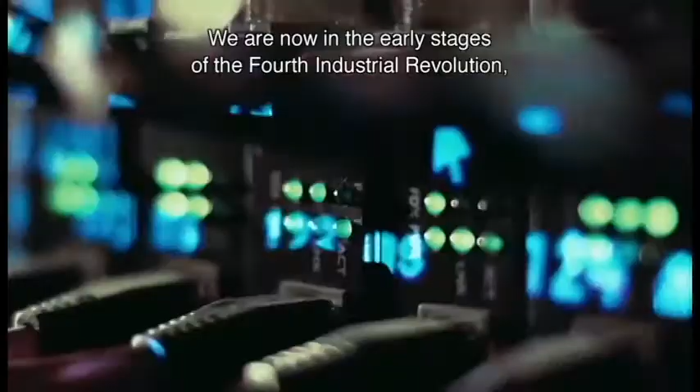We're now in the early stages of the fourth industrial revolution, which is bringing together digital, physical, and biological systems.

One of the features of this fourth industrial revolution is that it doesn't change what we are doing, but it changes us.

We need a different economic model that will allow us to meet the basic needs of every human on the planet, focused not on growth per se, but on maximizing human well-being. We have energy technologies that can power our civilization, but how do we get it and implement it at the scale we need, at a price people around the world can afford?

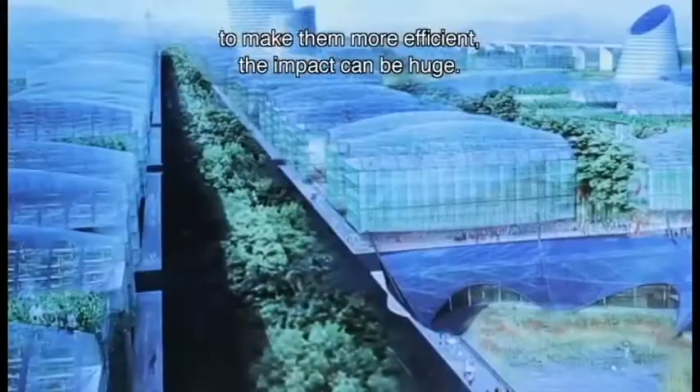If we're able to transform cities to make them more efficient, the impact can be huge. We can use asset tracking, IT, and 3D printing to decouple growth from the resource constraints we have. The question of adding quality to quantity is really about a diverse, safe, healthy, and just world.

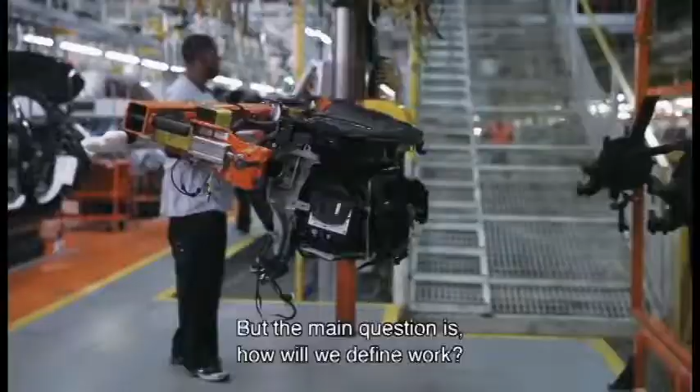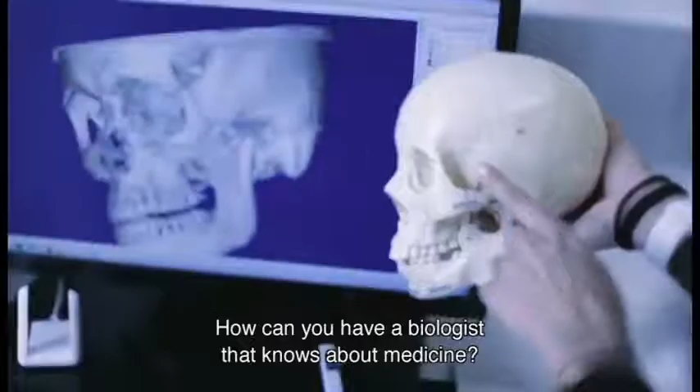It's serious, but the main question is, how will we define work? How will we share the wealth? How can you have a doctor that really knows a lot about data? How can you have a biologist that knows about medicine?

We have to create a space that enables people to think freely, to think divergent thoughts, to think creative thoughts. We really need this ability of digital technology to change outcomes, to truly empower people to create a better world.

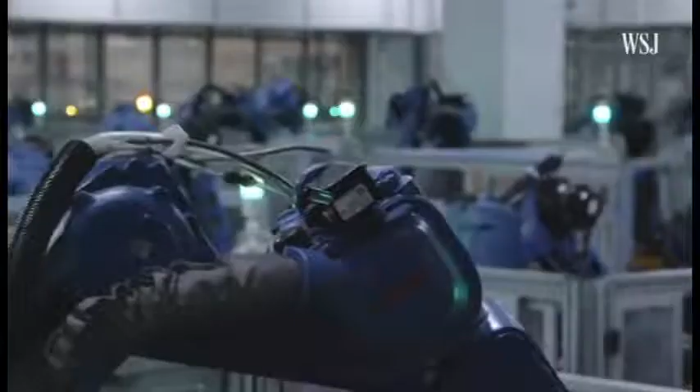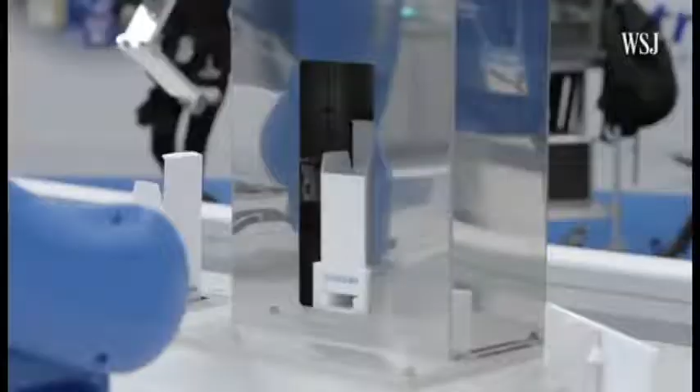Some economists say the world is entering a second machine age. Artificial intelligence and other advancements are enabling robots to do tasks that until now only human eyes, minds, and hands could handle. The head of the robotics division at Yaskawa, Masahiro Ogawa, seems most excited to talk about robots that don't need to be walled off from humans, that work alongside employees.

In the industry, they're called cobots. The International Federation of Robotics predicts that in coming years, cobots will lead the robotics industry. That's partially what's driving startups like China-based Elephant Robotics to get in the game.

If it hits a person, it will just stop. Yeah, so it works with people. Yeah, it works with people, yeah.

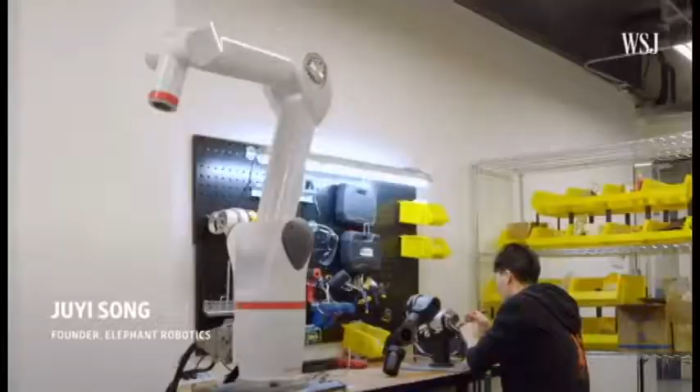We asked their founder, Juyi Song, how his cobot is different from traditional robot arms. It moves not that quickly, and it is very, very light, so it can work with people. This is the most important thing.

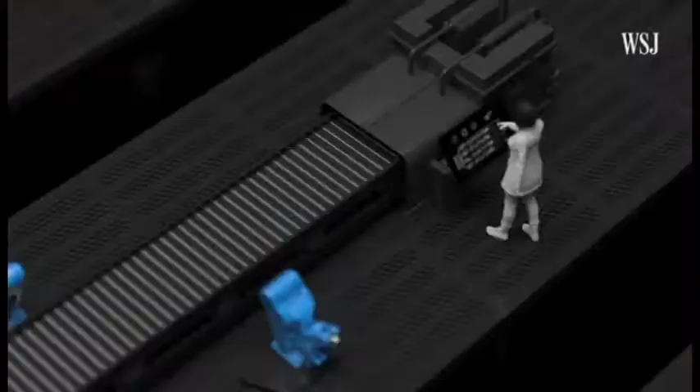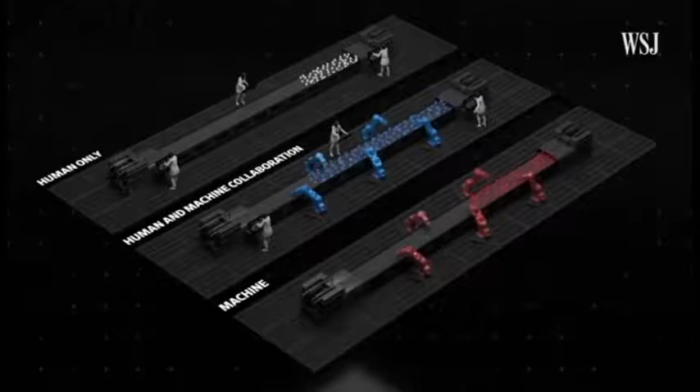In addition to being safer, the collaboration proves to be more productive. A study conducted by MIT researchers found that human-machine groups were more efficient than teams wholly comprised of one or the other. They also reduced human idle time by 85%.

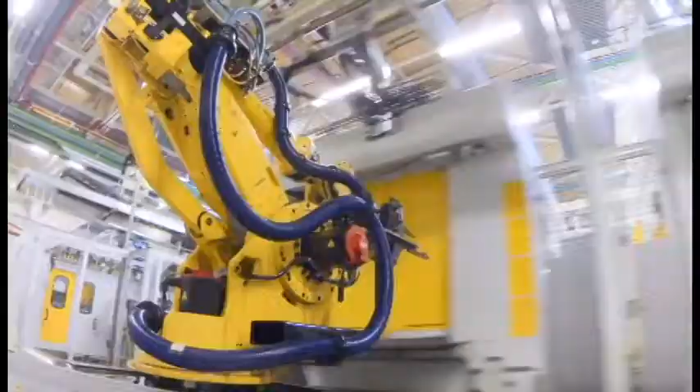Robots and factory automation solutions have been facilitating industrial production for over 60 years. FANUC is present in 120 countries, including Hungary, assisting key sectors like the automotive industry.

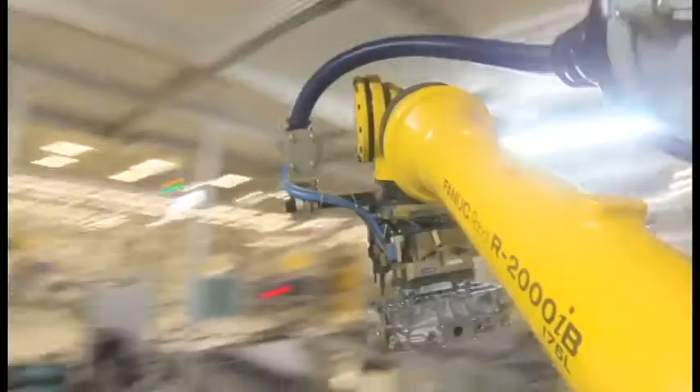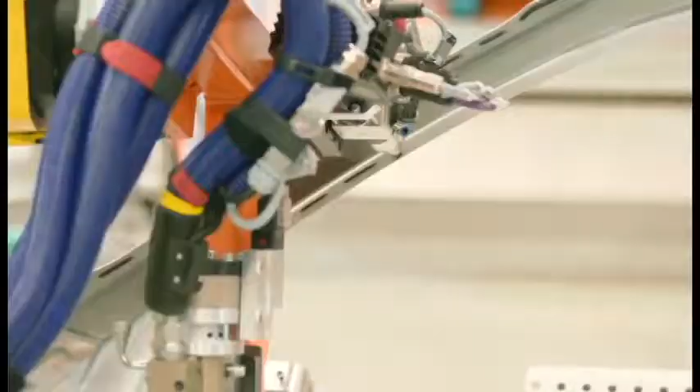For example, at the Audi Hungary Motor Limited factory in Győr, they are developing and manufacturing cars for Audi AG and the Volkswagen Group. Audi Hungary is one of the companies with the largest turnover and export in Hungary, producing 2 million engines and 135,000 cars in 2014.

In our experience, FANUC robots work reliably at our factory. We are constantly improving our production and installing robots to reach our targets. In environments where we need to work with high pressure or temperature, the robots are up to the task and deliver quality standards which would not be possible with human machining.

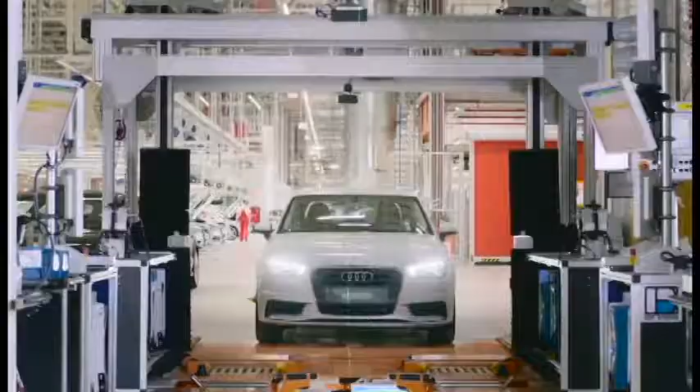Essentially, robots are used for applications too difficult for humans, or where rapid machining is required. Our colleagues like working together with robots, as they make human work easier by handling these tasks. It's very important to program these robots correctly, because when problems arise, it's usually not the robot that causes them, but improper programming or lack of maintenance.

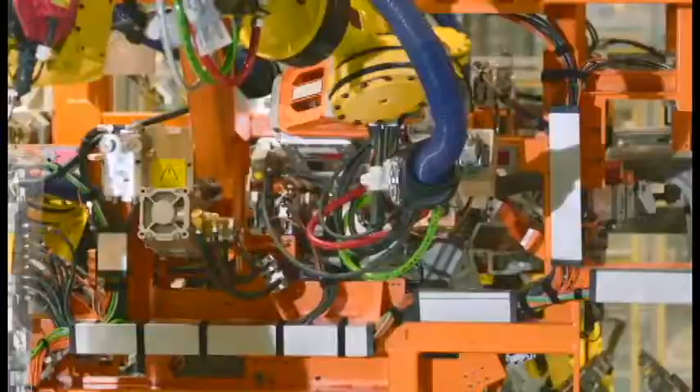Regarding this, I'd like to highlight that FANUC robots are easy to program, dependable, and we have very good experience with them.

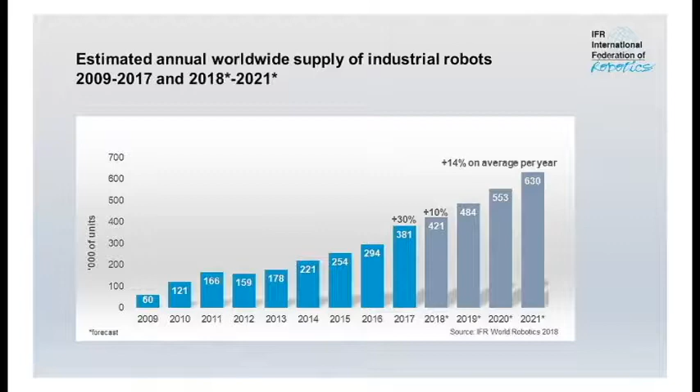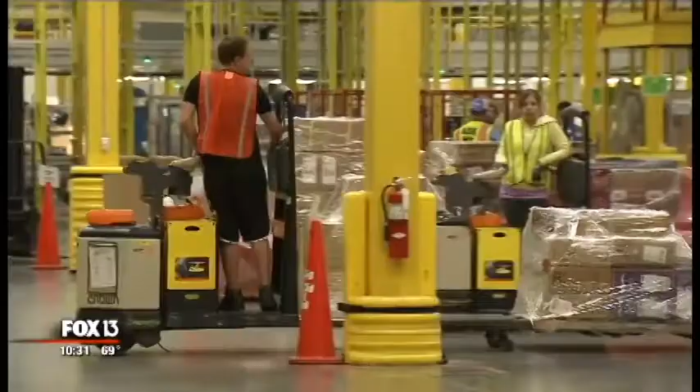With a footprint equal to 59 football fields, this Amazon fulfillment center is simply mammoth. We have the packing, the picking, the slamming, the shipping, the receiving. It's home to an army of employees - a little bit over 800.

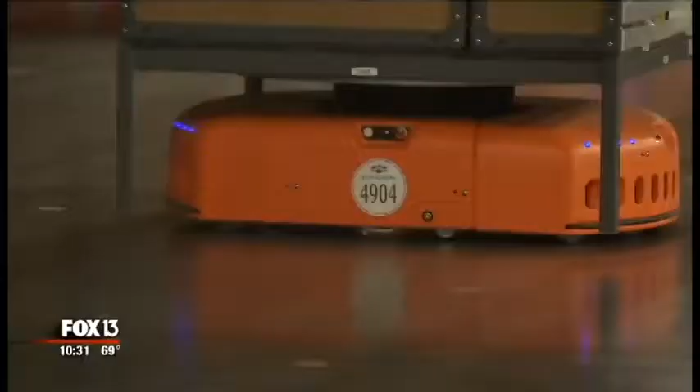One 6-ton pallet-slinging robot we affectionately call Robo-Stow, and a squad of box-shuffling cyborgs. We like to think of it as a symphony between robots and our great associates.

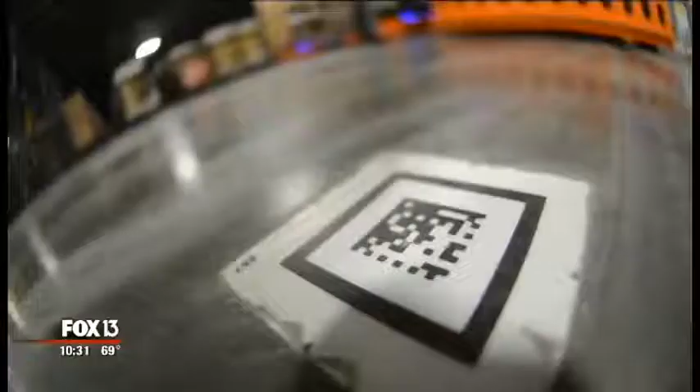We found a secret at our feet. The floor is covered in tiny QR codes - it's sort of like a chessboard. Eyes in the robots' bellies read the codes and broadcast their position, a choreography that keeps your shipment on time and avoids collisions. They know exactly where to go.

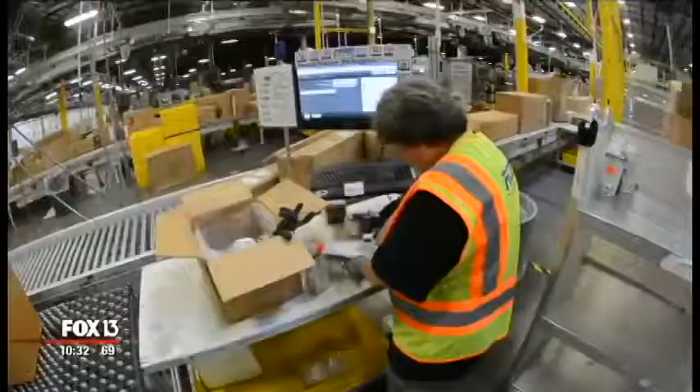Amazon says those shelves are home to 1 million different items. You think the typical customer realizes that? Probably not. We even spotted a toilet in stock - you name it, we have it.

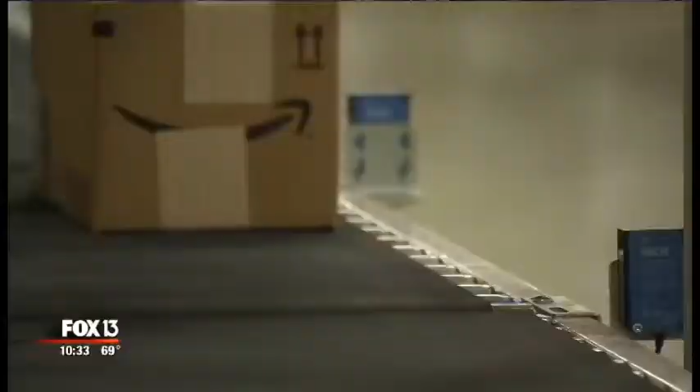Chaos and a supersonic conveyor are what we expected. Manager Chris Monnett explained that speed isn't everything - the important thing is just the flow.

Order levels fluctuate, and yes, there are rush hours. Yet Amazon says its software regulates the line to maintain a steady pace. In order to have 1 million unique items in this facility, you have to be able to do that.

As gaping, gargantuan, gigantic as this fulfillment center is, it's not alone - we have 109 fulfillment centers worldwide. Locally, 59 football fields probably isn't enough either. Our tour guide...

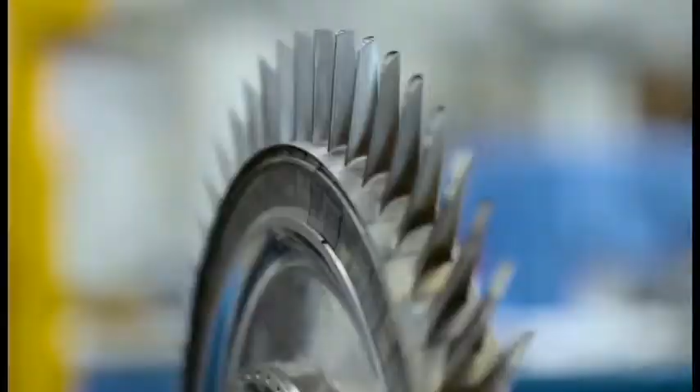The additive manufacturing process enables us to manufacture parts that we cannot manufacture today with normal, traditional manufacturing processes. That enables us to be more ingenious in terms of how we design our turbine blades, how we cool them, and how we life them.

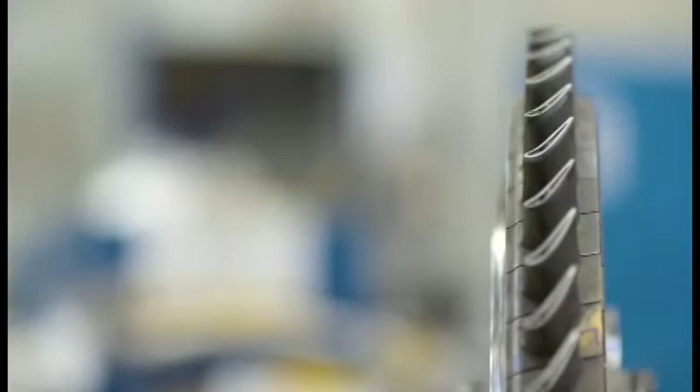Turbine blades has always been, I feel like, a vision. It's a real target, it's the most challenging area of the turbine. So if you can print a turbine blade, you can pretty much print anything. And we've proven over the last couple of weeks now that we have been able to print a turbine blade and test it in an industrial gas turbine engine.

In Lincoln, we're testing a 3D printed blade, and we believe this is special because it's the first time anywhere in the world this has been tested at full load conditions in a gas turbine.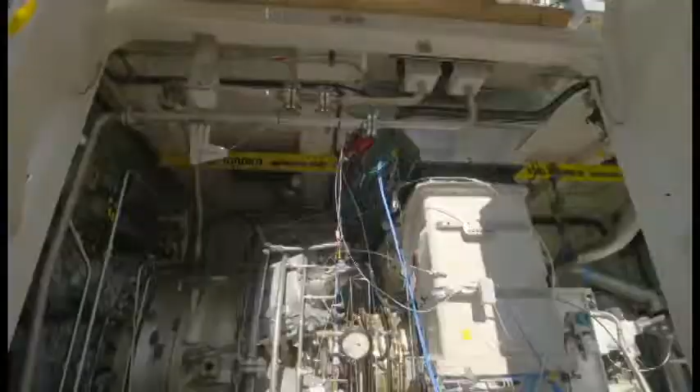We test these blades very quickly. In 1 hour, we run the engine at full load. We put a probe in here to measure the material temperatures which tell us how long this blade will last in a turbine. Now, the turbine blade itself is this particular blade.

Now, this is the high-pressure turbine blade of a 13-megawatt SGT-400. Typically, we have to do all of the design, analysis, the aerodynamics, the work in terms of heat transfer on this blade 2 years before we can actually then understand in an engine how it's actually going to perform.

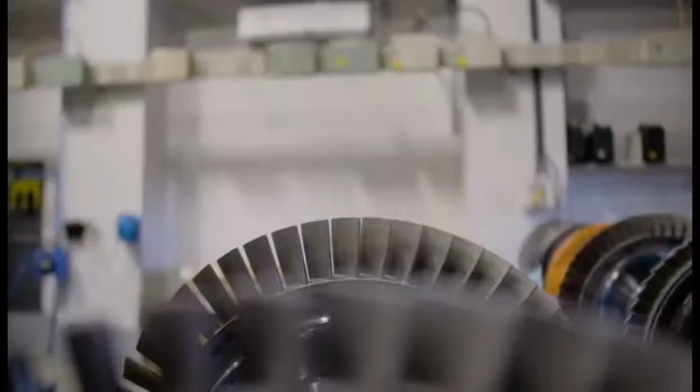What additive manufacture does - and this is the additive manufacture blade that we've actually tested in this engine - this gives us the ability to cut that lead time down from 2 years down to 2 months. It allows us to create new designs, to get more efficient engines, more efficient designs into our turbines, tested, and then onto ultimately our customers.

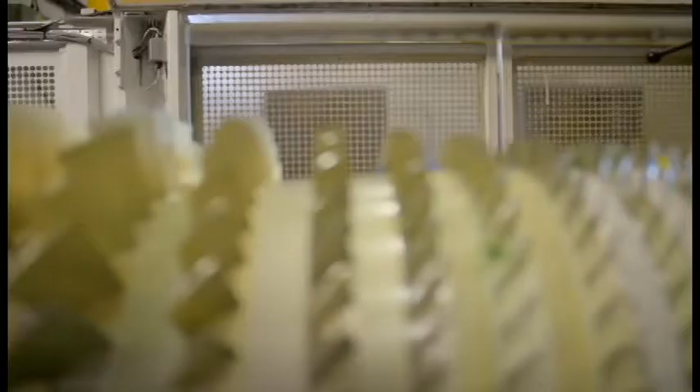We will see quicker development times. You don't need this very expensive tooling in order to make your products, so that makes additive manufacturing perfect for design modifications. You'll get there much quicker.

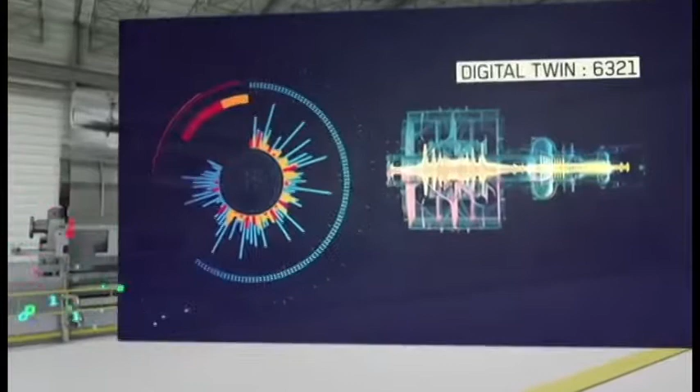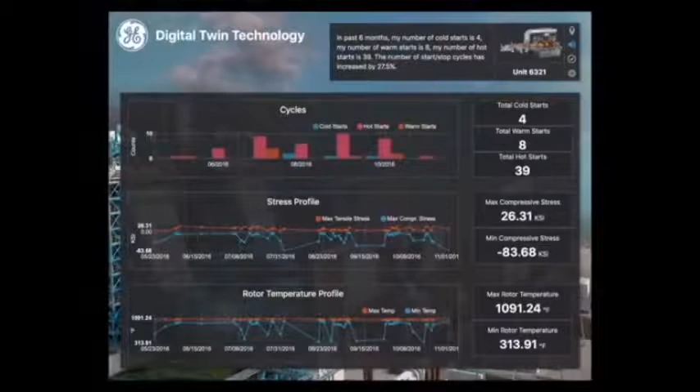Operator, a change in my mission is causing damage to my HP turbine rotor. Okay, Twin, help me understand the problem - what's your operating profile? In past 6 months, my number of cold starts is 4, my number of warm starts is 8, my number of hot starts is 39, the number of start-stop cycles has increased by 27.5%.

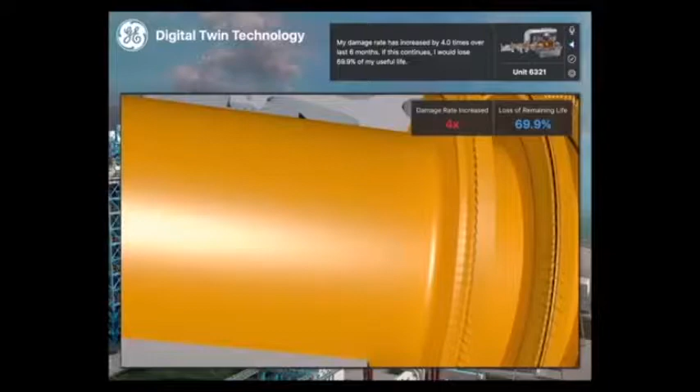Twin, tell me about your rotor damage. My damage rate has increased by 4.0 times over last 6 months. If this continues, I would lose 69.9% of my useful life. Twin, give me options for mitigating that rotor damage.

Based on weather forecasts, historical data, fuel cost, electricity pricing and my present condition, I have 2 options for you to optimize operations. Option 1 is to manually slow down my startup ramp rate so that you can reduce the wear on my rotor. Option 2 is to download the OpFlex app and apply stress controls to minimize wear and reduce fuel consumption too.

Twin, give me the factors you use to calculate option 2. I used my past 15 years of historical data, fleet learning from 125 other D11 steam turbines like me, and 58,965 simulation runs to get this recommendation. I'm 95% confident of my assumptions.

Twin, I need a financial perspective. Tell me about the numbers. The numbers look good. We can reduce stress by 25%, which brings the damage rate back to normal range. Startup fuel cost will go down by 40% and startup time will be cut by 50%. You will also avoid $12 million by preventing an unplanned outage.

Twin, okay, I select option 2. Let's do it. I'm initiating option 2, which is Flex Start. Thank you. This is happening now, today.

This is a representation of a D11 steam turbine that's currently running in Southern California. We call these representations digital twins. What you saw was an example of the human mind working with the mind of our machines. What's a digital twin?

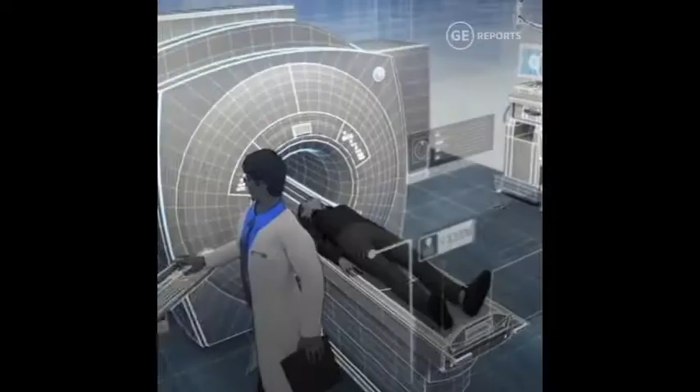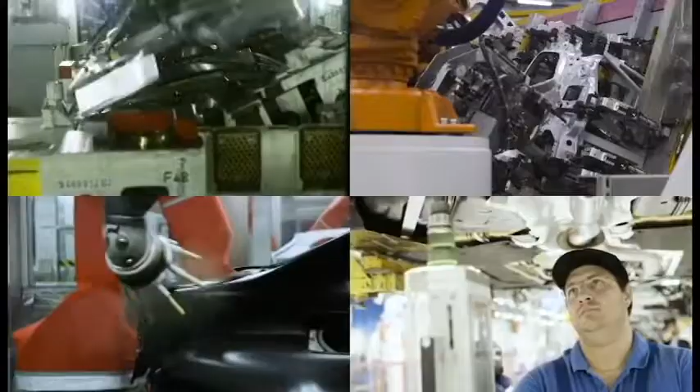Digitalization opens up fascinating new possibilities for the BMW production system. Large quantities of data are generated at many stages in car production. Today, we are already drawing major benefits from intelligent analysis of production data. Our customers benefit from even higher quality. Production uses resources more efficiently, and we are able to manage system maintenance more precisely. Let's take a closer look at the innovative solutions that emerge when our specialists immerse themselves in the virtual world of data.

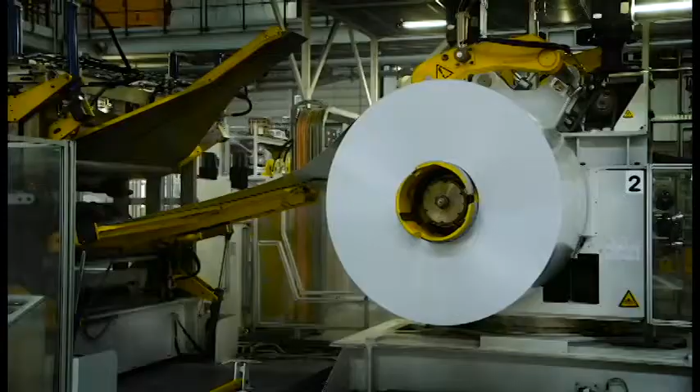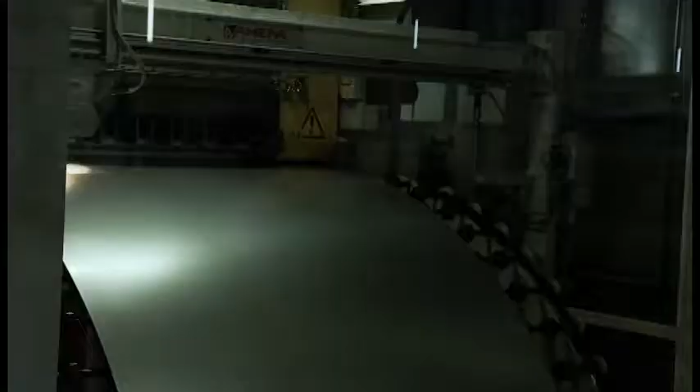Starting with our new BMW X1, several kilometers worth of steel are used to form parts for the body. But on a 3-kilometer roll of steel, there are bound to be deviations. The material is not equally strong or thick in all places. Some areas have been oiled more, some less. So how can the press that forms the flat sheet into body parts be adjusted to the unique individual characteristics of a cut panel?

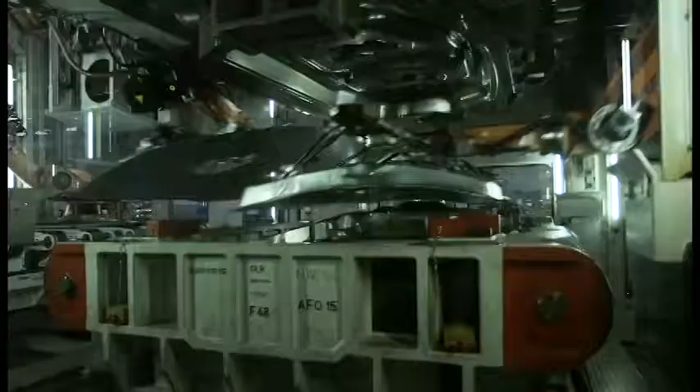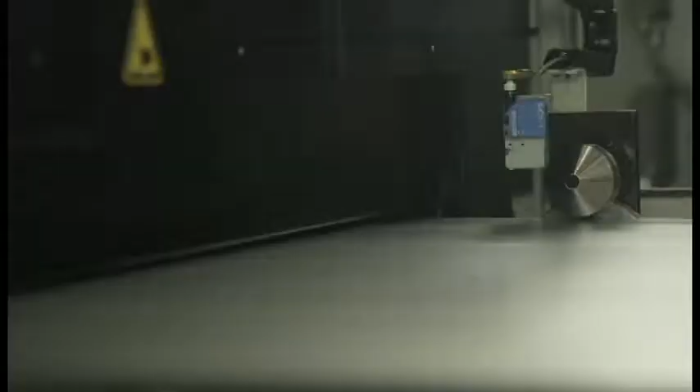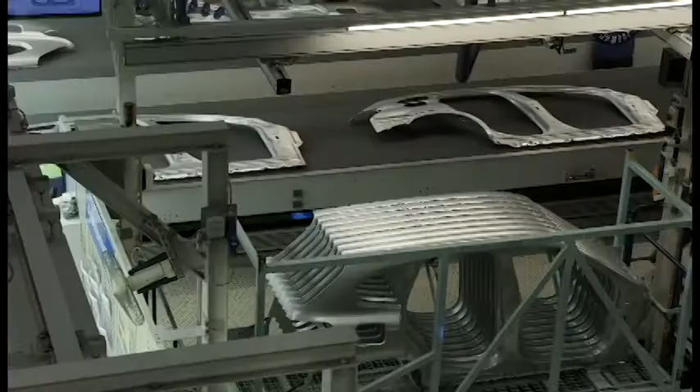Here's the solution. Each tailored piece, also known as a blank, is gauged and given a laser marking with data that can be transmitted into the press. The individual parts formed in the press shop proceed to the body shop. Just like in a jigsaw puzzle, these parts are fitted together step by step to create the body.

Predictive maintenance ensures reliable operation of a large number of systems. It can also predict breakdowns before they occur. Sensors monitor electric drives for lifts and turntables, for example. Up to 2,000 robots perform welding and bonding operations with maximum precision.

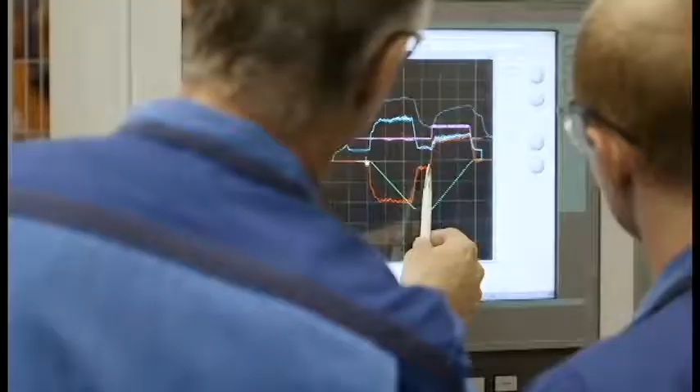Sensors monitor the status of the robot's gears and brakes so they are always fully synchronized. Cylinders and valves in welding guns and welding heads are also constantly monitored and analyzed. As a result, maintenance technicians are able to intervene at exactly the right times. This ensures optimal utilization of production facilities.

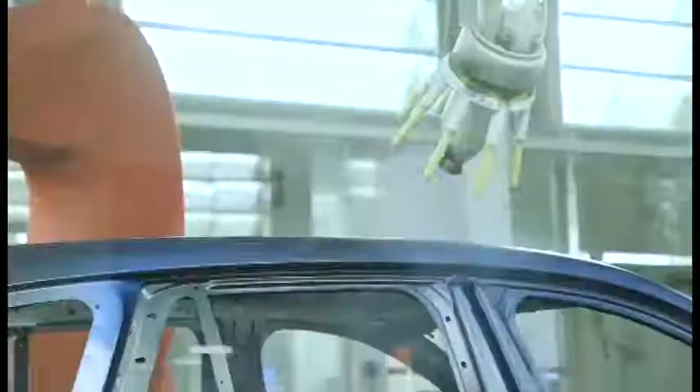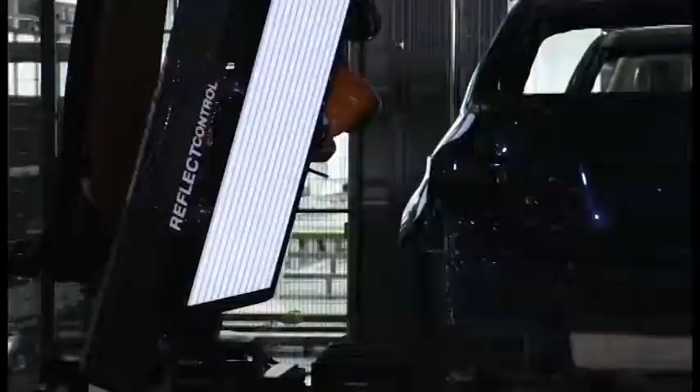Sensors also monitor all production processes in the paint shop on an ongoing basis. Through online process control, large volumes of data are structured so that staff can fine-tune processes. Intelligent testing systems ensure the visual perfection of the painted bodies and guarantee the highest level of quality for our customers.

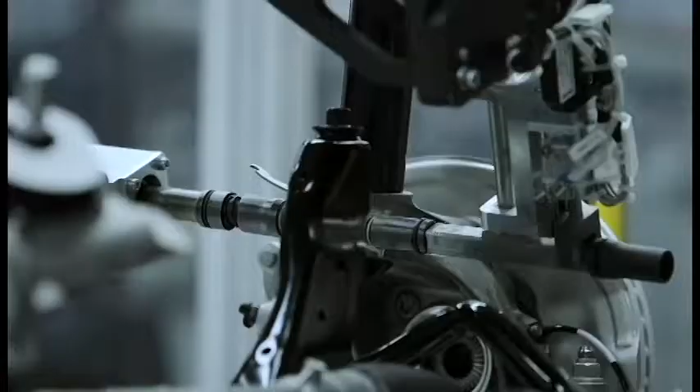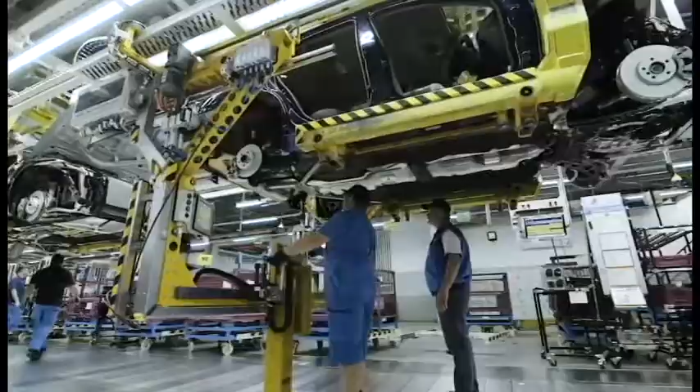Hundreds of bolted connections are made before the powertrain and interior equipment are fully installed in vehicle assembly. Data from the bolting processes, such as tightening torque, is used by quality management staff for systematic monitoring of these processes. Important findings from analysis of this data are incorporated into staff training to help avoid errors. This creates a closed loop of continuous improvement.

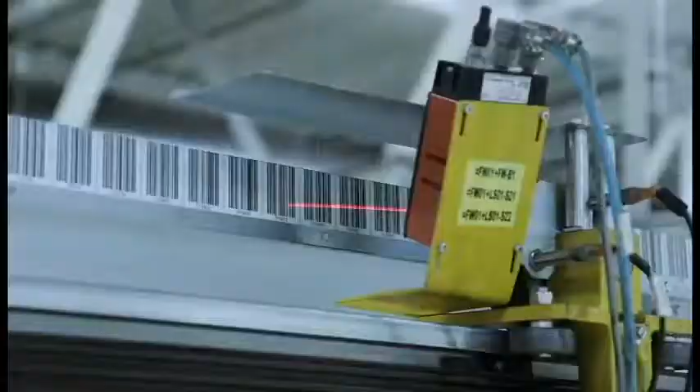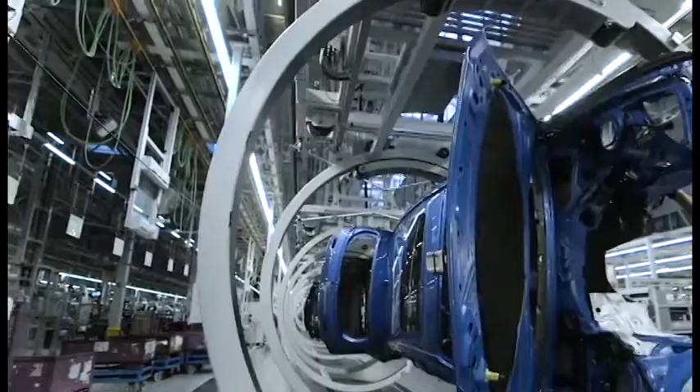A single assembly line builds many different models, so it naturally causes problems if the conveyor comes to a standstill. Therefore, a large number of sensors constantly monitor the conveyor system. Data from these sensor kits is streamed live to the BMW Internet of Things platform, where it is visualized and analyzed in real time. If the platform reports a trend indicating deviation from target, staff can decide whether to remove the hanger for maintenance. In this way, it's possible to ensure long-term, reliable operation over a number of years.

Our focus is on intelligent analysis of data from production so that we can make the right improvements to our processes and achieve the highest level of quality and sheer driving pleasure.

I think in general all these predictive tools help to increase the uptime and eliminate unplanned downtimes. You need to go step by step. First of all, you need to have connectivity to your equipment at your customer site. From there on, you can collect more and more data and move into a proactive model. But from my perspective, it's a long-term journey over 2-3 years to come from connectivity to remote service to predictive service.

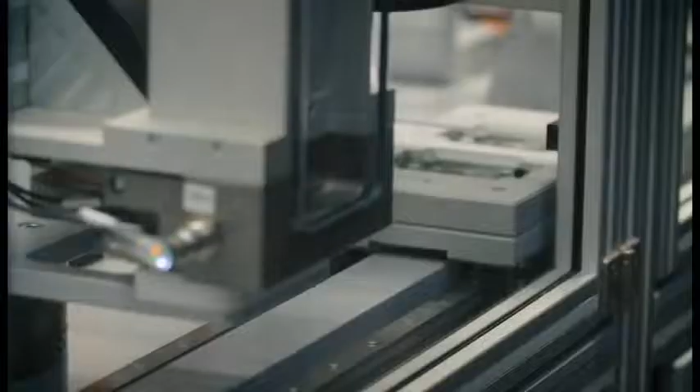For my product, well, actually I'm in the security area, and for sure it would be good to think about what could be the next step of an attacker. We're working on that so that we can really use machine learning to understand the upcoming attacks better and improve our detection capabilities.

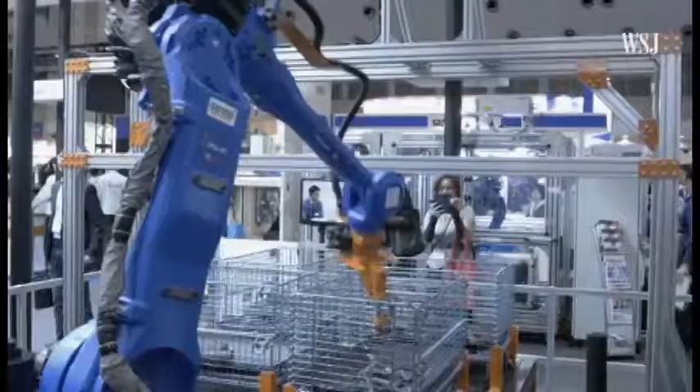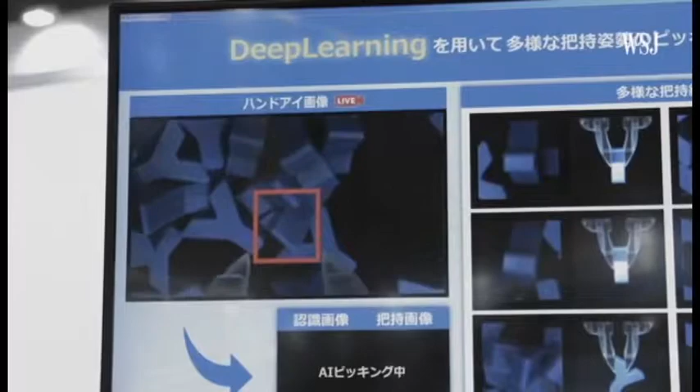One really important thing to do on the factory floor is just be able to recognize objects, and that's something that only humans could do well until recently. At IREX, we witnessed a robot handling a task that I, as a human, don't do so well, futzing with one of those pesky tape dispensers. It's among the latest offerings.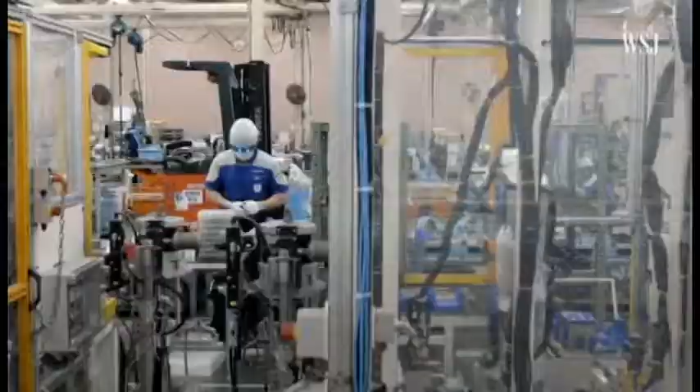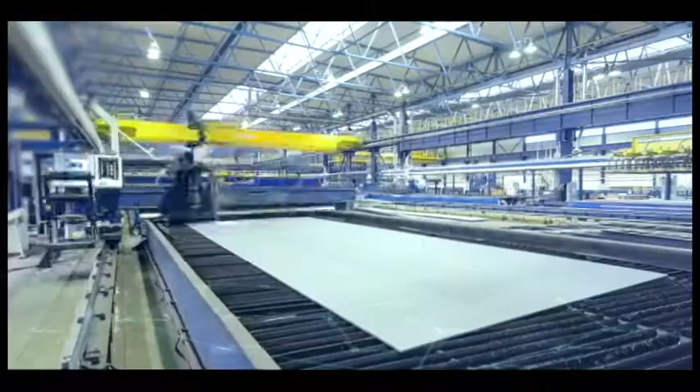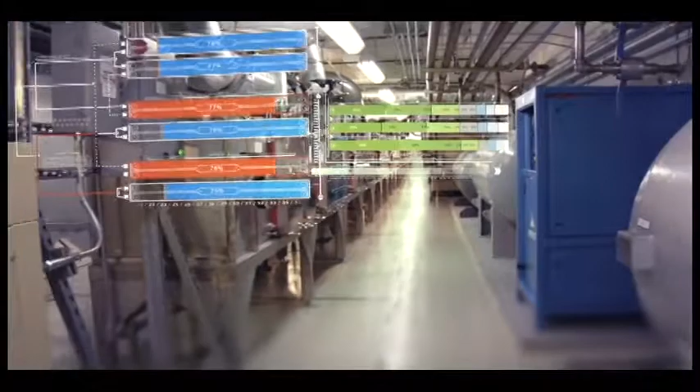Internet of Things today has become a key enabler for enterprises to drive business growth, achieve operational excellence, improve customer experience, and open up new revenue streams altogether. With IoT expected to create a value add of up to $11.1 trillion by 2025, it is addressing the long-standing priorities of key stakeholders across industries, such as getting real-time visibility into changing customers' expectations, improving manufacturing and supply chain efficiencies, and making their organizations smarter, intelligent, and agile.